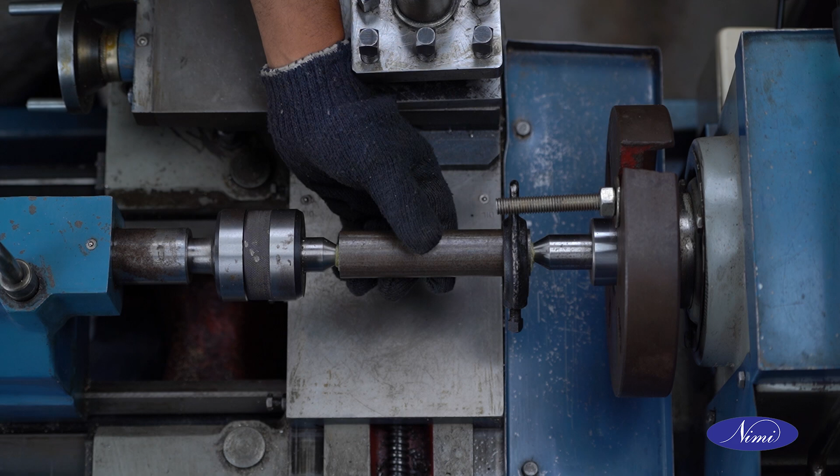And welcome to this session on mounting jobs in between centers. Let us begin with the session.

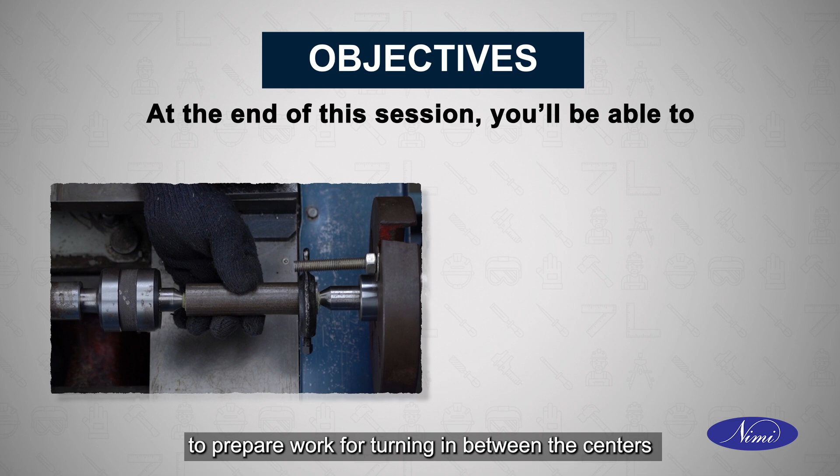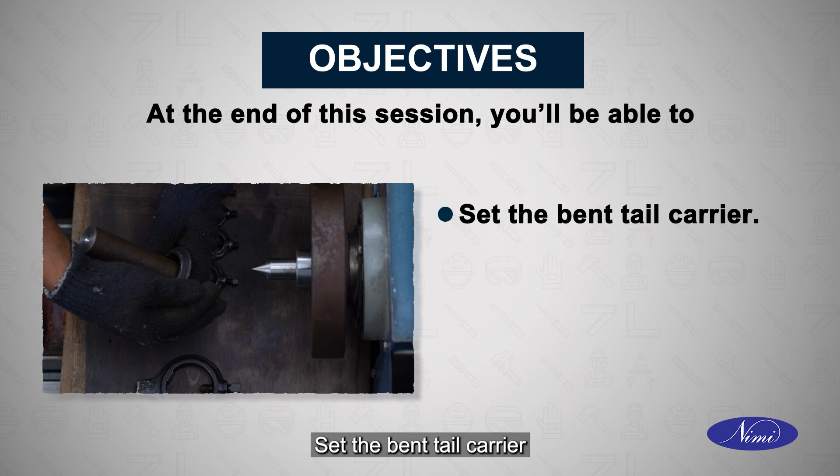Let us now look at the objectives of this session. At the end of this session, you will be able to prepare work for turning in between the centers, set live and dead center proper alignment, mount the catch plate, set the bent tail carrier, and support the job in between centers.

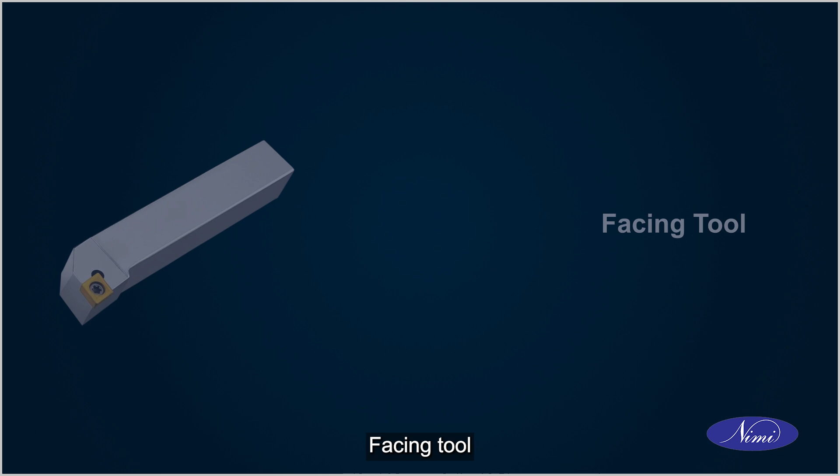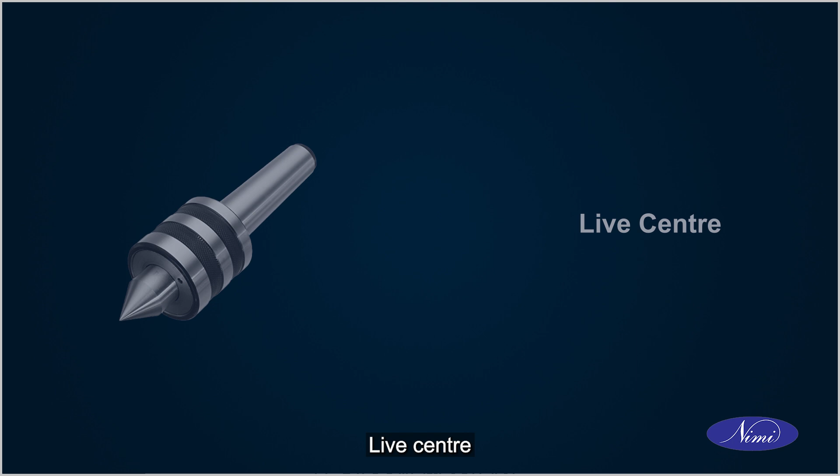The tools required to perform this operation are facing tool, center drill, drill chuck, driving plate, live center, dead center, lathe carrier, and surface gauge. Let us now learn to prepare the workpiece for turning in between centers.

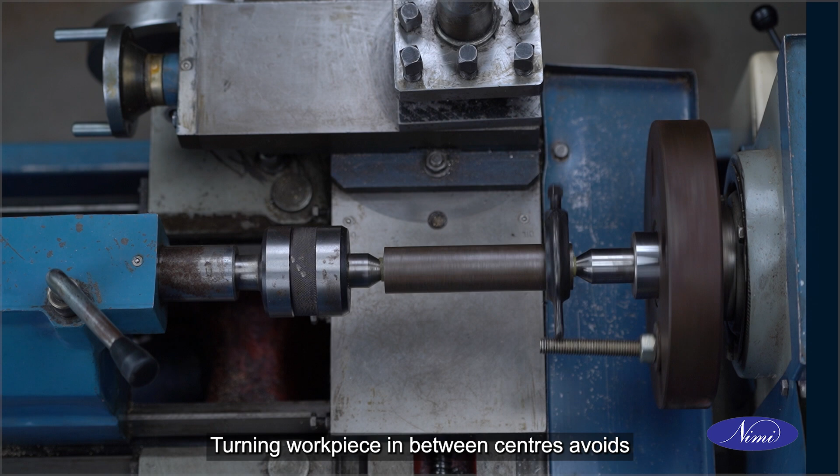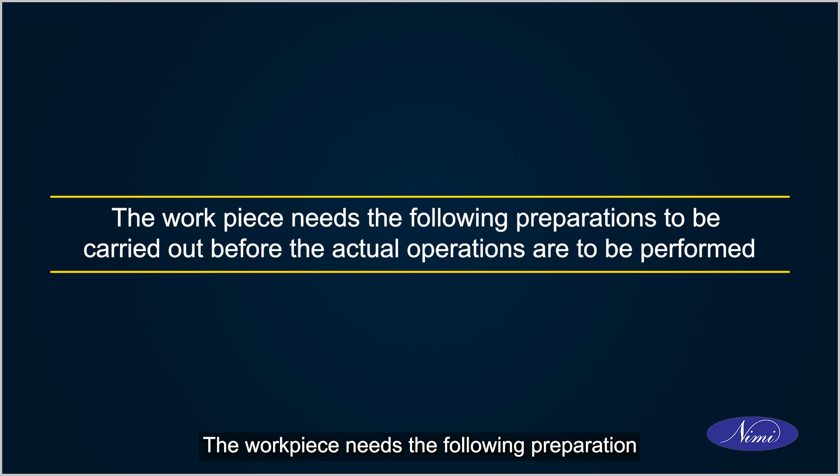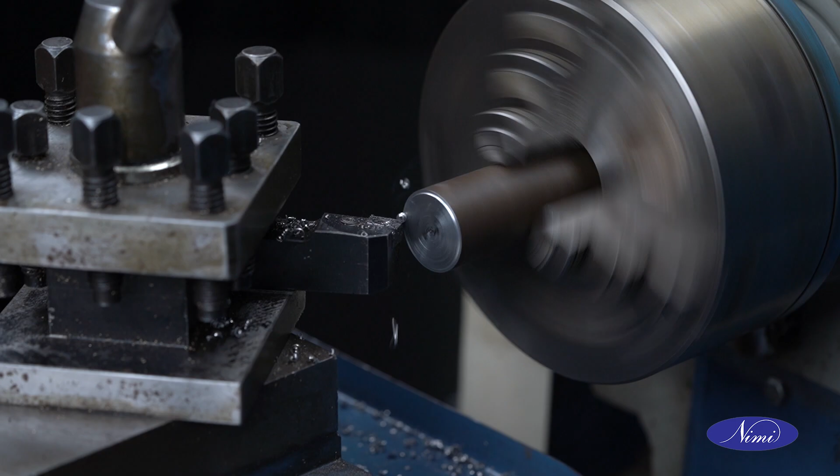Turning workpiece in between centers avoids the need for truing the work. The workpiece needs the following preparation to be carried out before the actual operations are to be performed. Face both the ends of the workpiece. Perform the center drilling operation at both the ends.

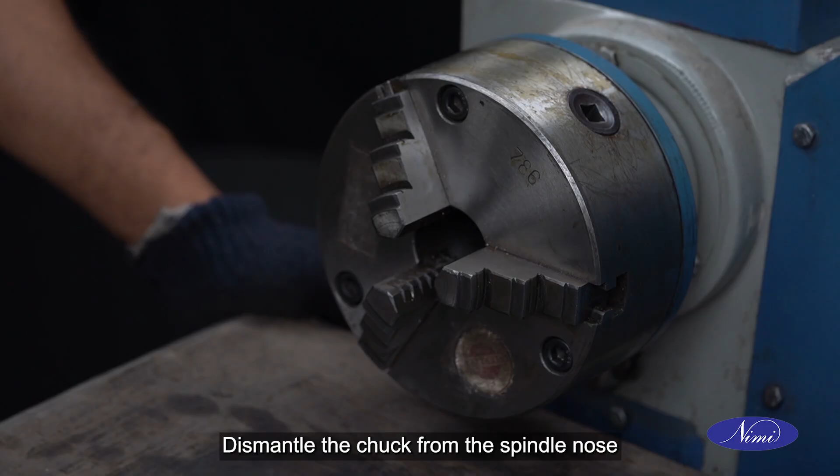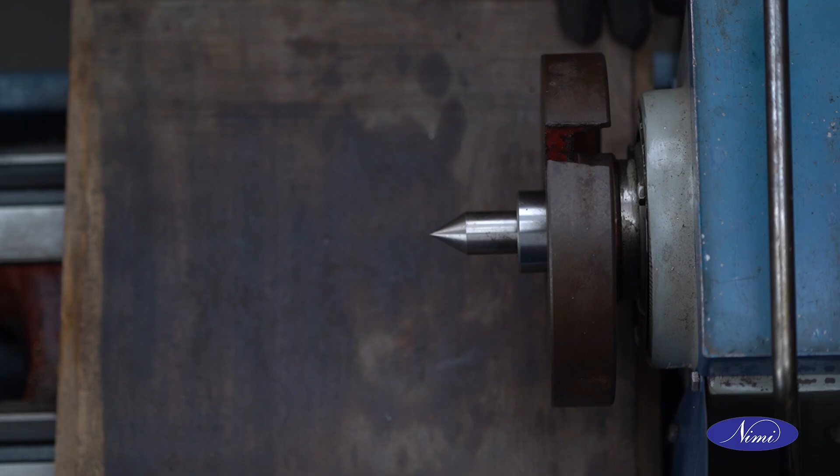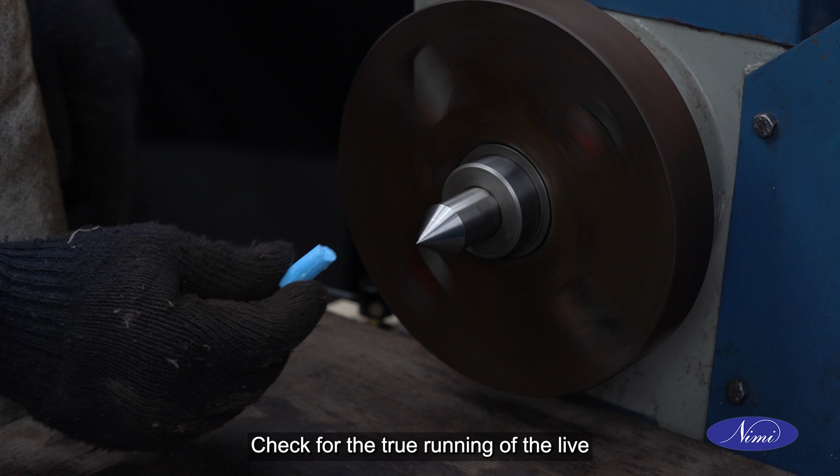Dismantle the chuck from the spindle nose. Assemble the driving plate or catch plate. Assemble the spindle sleeve to the spindle nose. Fix the live center to the sleeve. Ensure that the spindle sleeve and live center are free from damages, burrs, and are thoroughly cleaned before assembly. Check for the true running of the live center with the help of a chalk.

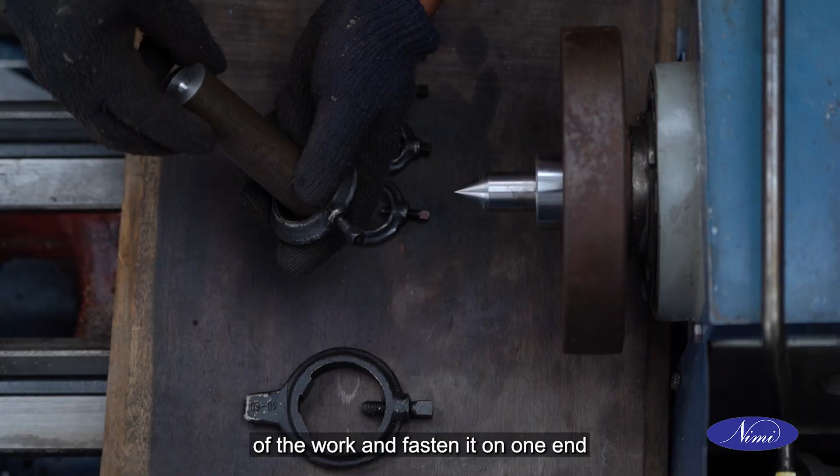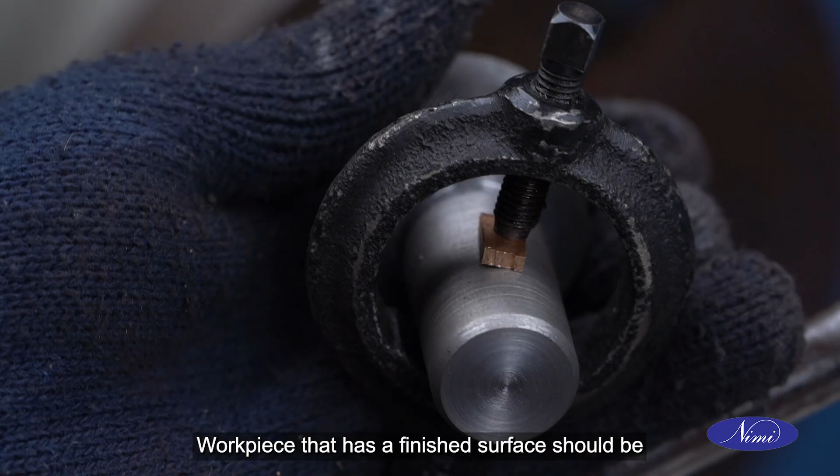Select a suitable lathe carrier according to the diameter of the work and fasten it on one end of the work with the bent tail pointing outwards. Workpiece that has a finished surface should be protected by inserting a small sheet of copper or brass between the end of the screw and the workpiece in the carrier.

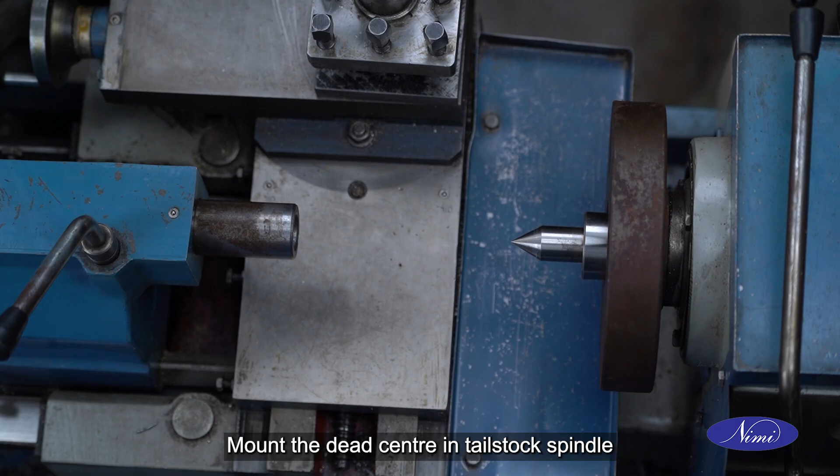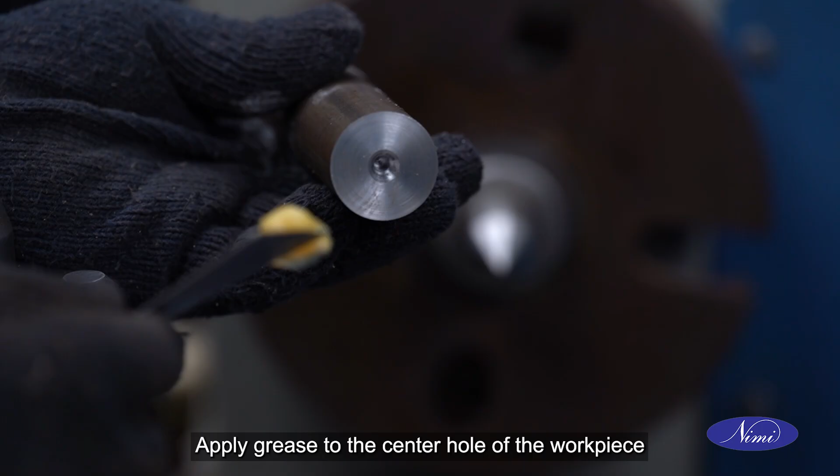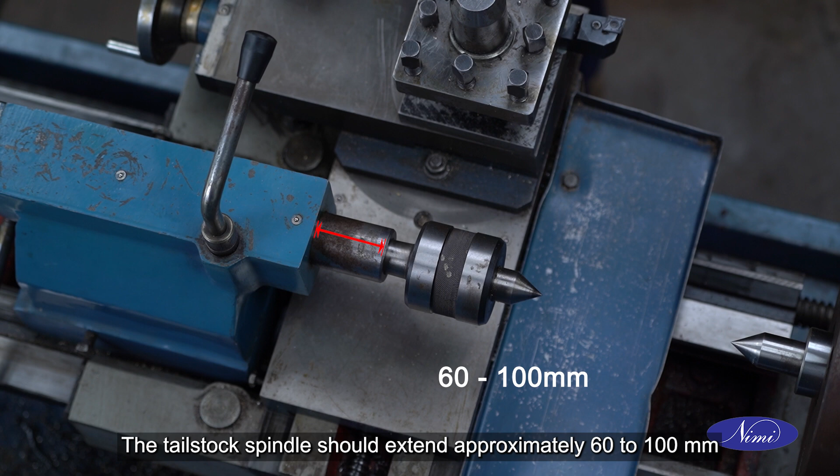Mount the dead center in tailstock spindle. Check live and dead center alignment. Apply grease to the center hole of the workpiece to be engaged by the tailstock dead center. Move the tailstock to a position on the bed to suit the length of the workpiece. The tailstock spindle should extend approximately 60 to 100 mm beyond tailstock. Clamp tailstock in position by tightening the tailstock clamp nut.

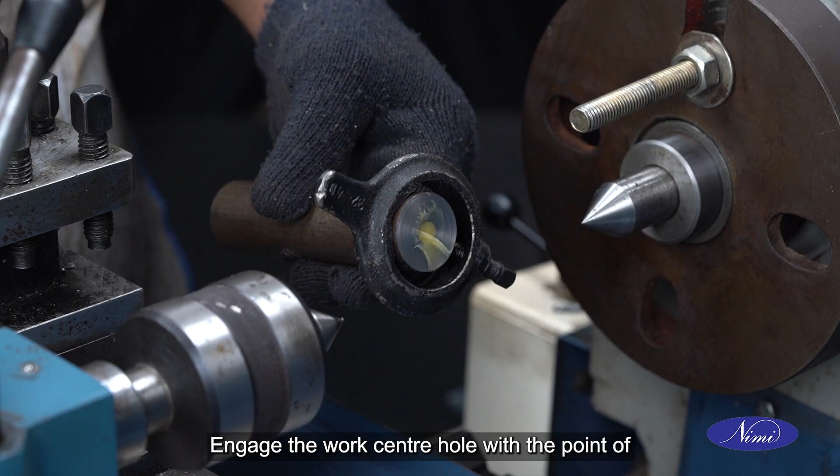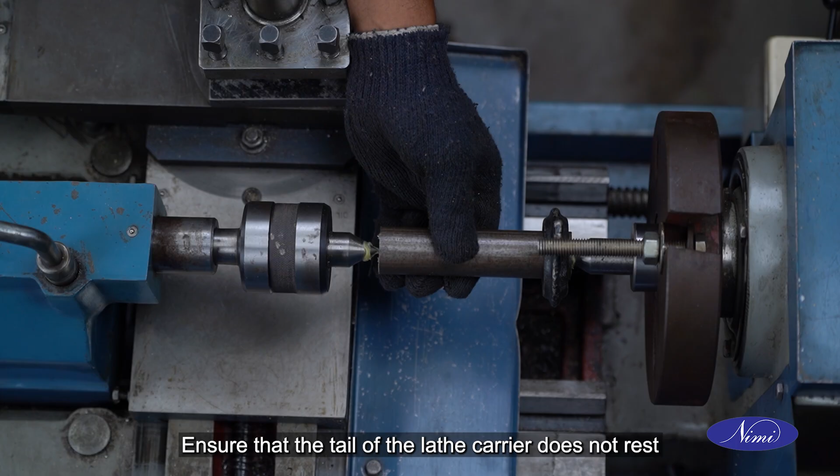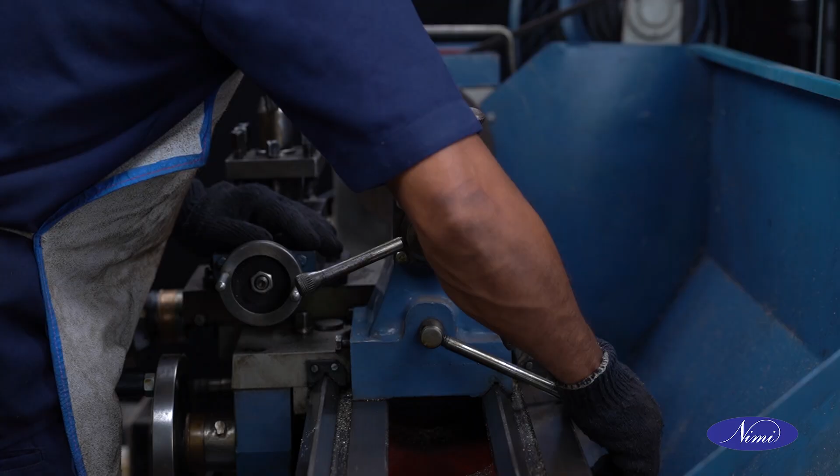Engage the work center hole with the point of live center and with the tail of the lathe carrier in the slot in the catch plate. Ensure that the tail of the lathe carrier does not rest on the bottom of the slot in the driving plate. Advance the tailstock spindle by the hand wheel rotation until the point of dead center enters the center hole of the work with proper seating, eliminating all endwise movement.

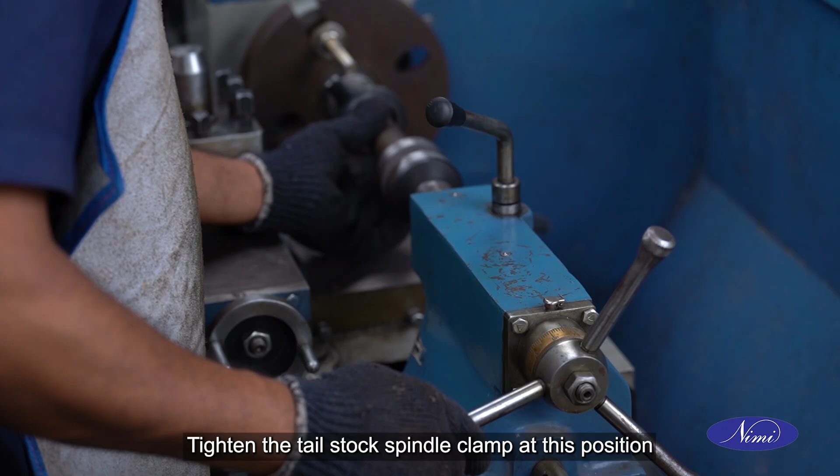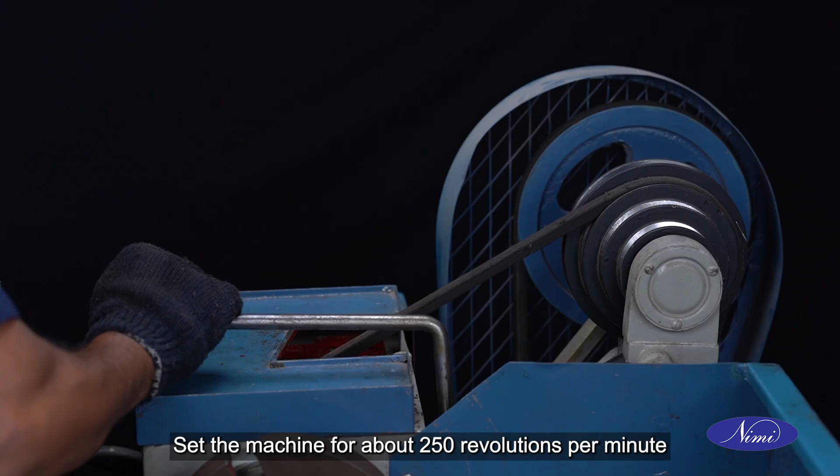Move the tail of the carrier back and forth while adjusting the hand wheel until only a slight resistance is left. Tighten the tailstock spindle clamp at this position and check that the resistance does not change. Set the machine for about 250 RPM and allow the work to run for a few seconds. Check once again for the resistance and adjust the tailstock spindle if needed. Work is now ready for operations.

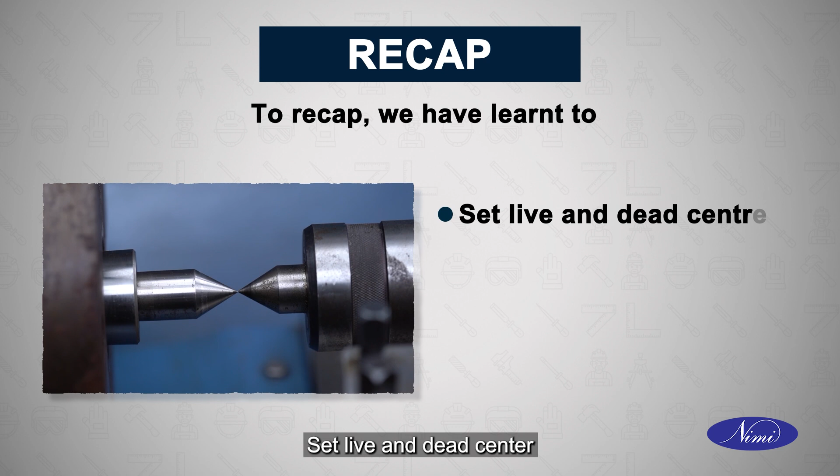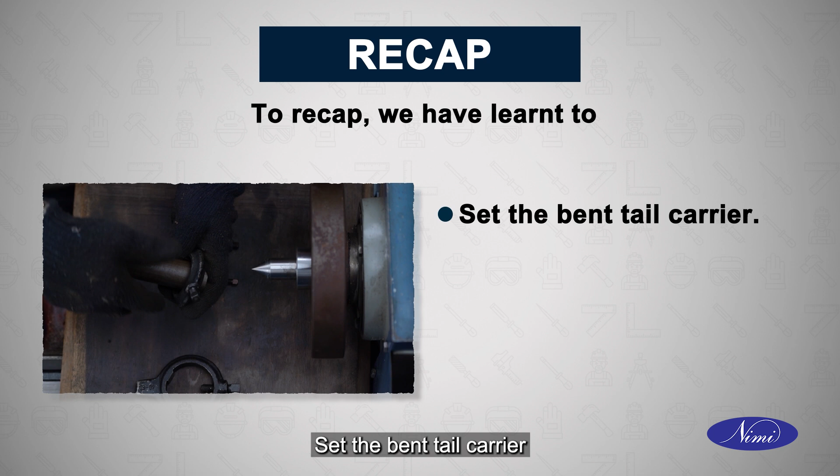Before holding the work in between the centers, ensure that the centers are aligned. To recap, we have learned to prepare work for turning in between the centers, set live and dead center proper alignment, mount the catch plate, set the bent tail carrier, and support the job in between centers. So that's all about mounting jobs in between centers.